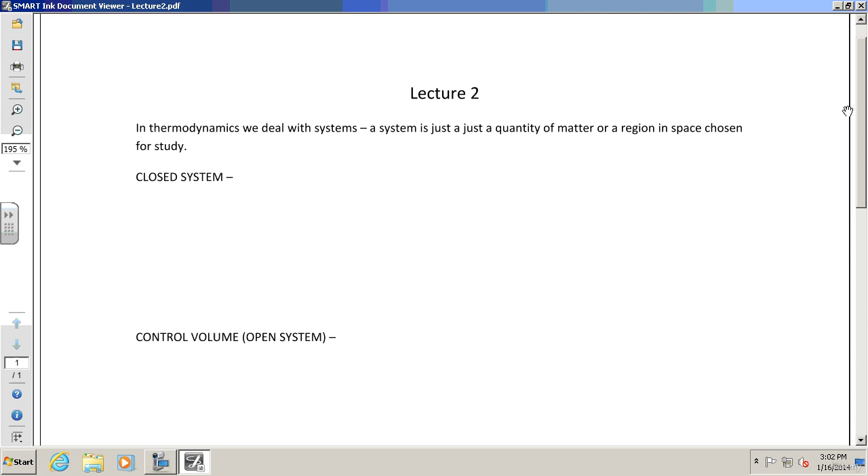All right. So now, with regard to some terminology, I wanted to just go over a few important concepts that we have in thermodynamics real quickly. A couple of important things that we're going to need to know as we go forward, okay? Basically what we're trying to do today is cover most of that first chapter, and you do have a homework due next week that's centered on that first chapter.

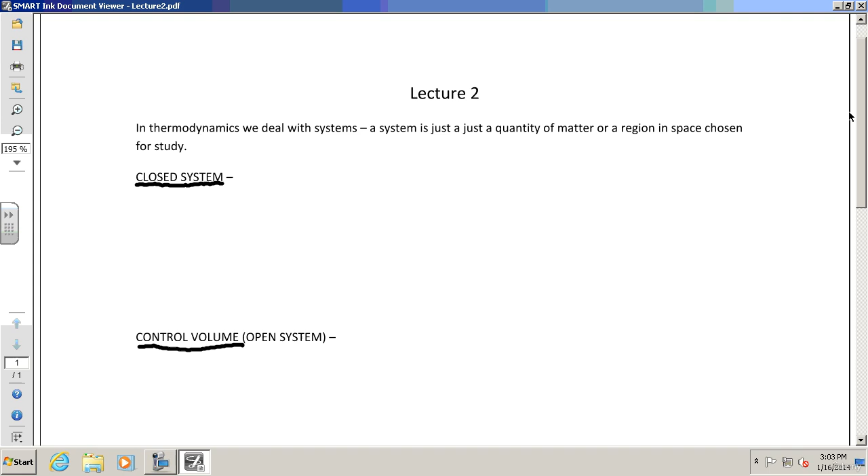One very important distinction in thermodynamics is going to be the difference between a closed system and a control volume. So let me first describe a closed system. It could be something like a box, like this. I like the example of a can of pop or something like that. A closed system is kind of like a pop can that you haven't opened.

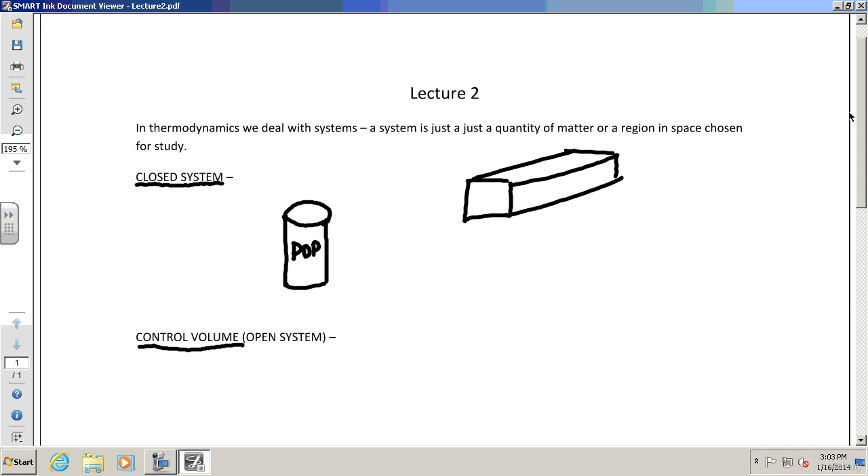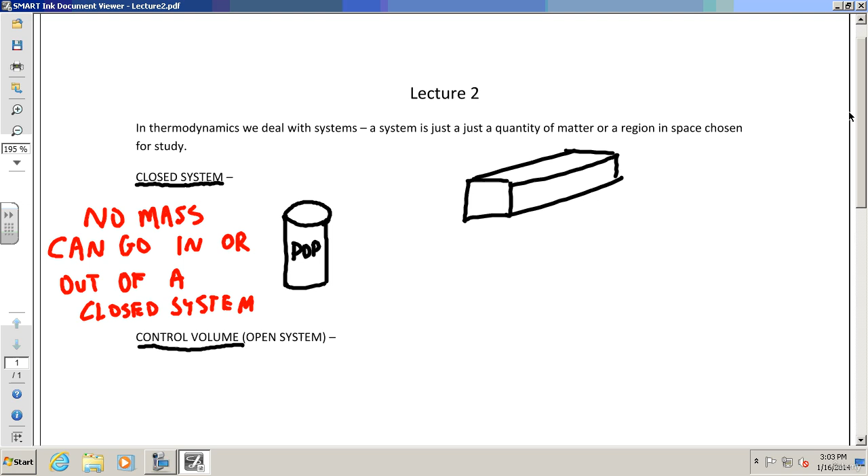There is no mass transfer. No mass can go in or out of a closed system. No mass can go in or out of a closed system. But that doesn't mean there's no energy transfer. You can still have energy going in or out of a closed system. For instance, use the pop can analogy.

Let's say I go downstairs and I get a can of pop. It's likely coming out of the machine cold. If I take this can of pop, I put it here on the table, and I come back 24 hours later, it's probably going to be a lot warmer, right? If I open it up, it's probably going to be room temperature. Now, that's a closed system. There was no mass transfer. If that pop can is still closed when I come back 24 hours later, it's a closed system.

But there was energy transfer, right? Because there was heat from the room transferred in to warm up the pop can. So you can still have an energy transfer in a closed system. There's just no mass going in or out. It's all inside. So no mass can go in or out of a closed system, but you still have energy transfer. That is a closed system.

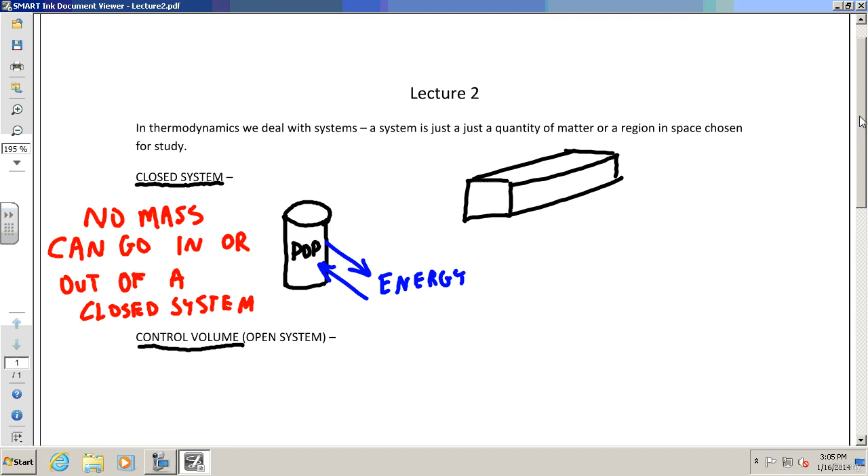We're going to be dealing a lot with closed systems, especially the first 5-6 weeks of the course. Closed systems tend to be a little bit easier to deal with than control volumes, open systems. So we're going to start there and analyze closed systems. But most of the world isn't like that. Most of the world has systems that have mass coming in and out and all sorts of stuff. And so then we have a control volume.

Now a control volume may look something like this. Maybe it's like a tube, and you have mass that can flow in, and you can have mass that can flow out. And of course energy can still flow in or out as well. A true control volume is nothing more than an arbitrary boundary that we put into practice. What I'm drawing for you there in green is an arbitrary boundary for our control volume.

That's what we're going to analyze when we get to control volumes. It will be an arbitrary boundary. I say arbitrary because if I were to show you a system, you couldn't see the control volume. You couldn't see the boundary. It's just in your mind. There's nothing real about it. We just draw a boundary. We say, okay, this is the volume I'm going to study.

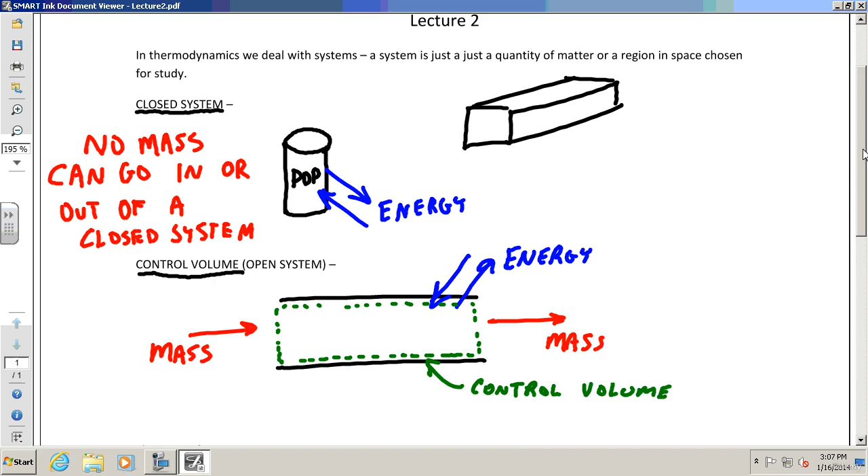But for the first 5 or 6 weeks, we're going to mainly focus on the closed system. Not that you will never see a control volume, but mostly we'll see closed systems. So there won't be mass flow. That's going to make it a lot easier. And then we get to the control volumes. I think you all can see the distinction there. It is an important distinction to recognize, because whether we model it as a closed system or as a control volume, the way we approach either one is going to be important.

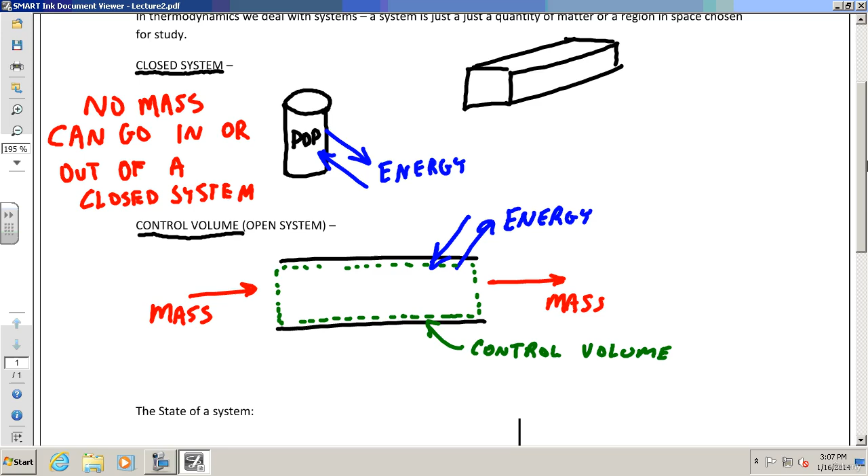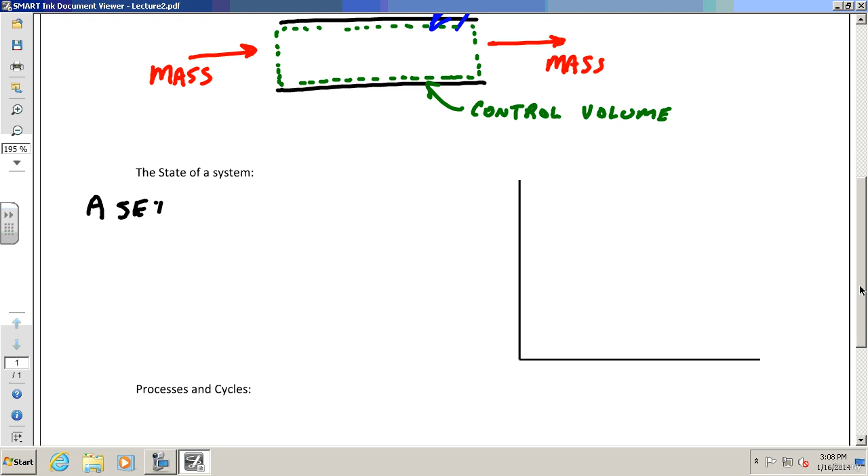All right. A couple more concepts and we'll be done. State of a system. The state of a system is also a very important concept. It basically is a set of properties that completely define a system. A set of properties that completely define a system. Now, you might say, well, what are properties? Properties are physical characteristics of a system.

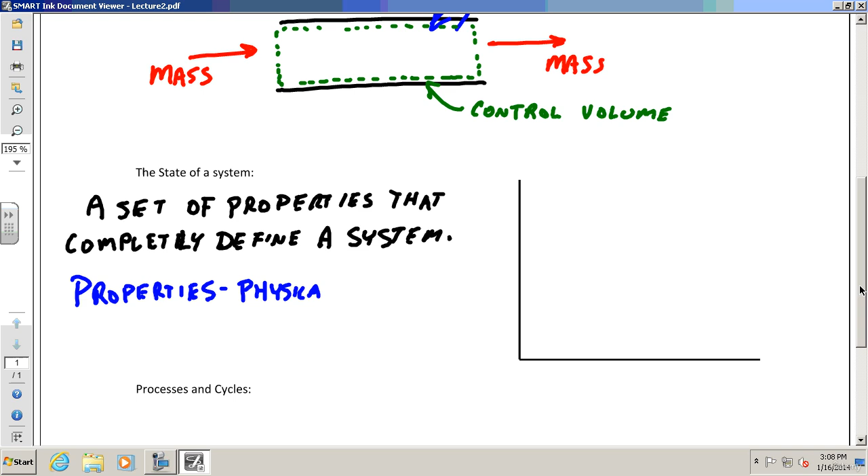Physical characteristics of a system. Now, what kind of physical characteristics might there be? Well, very simple things like temperature, pressure, specific volume. There's lots of them. There's other ones too. We'll get into them later. Okay? The things that define a system.

So, for instance, the pop can. What kind of properties might be of the can of pop when I get it out of the machine? Well, the can of pop probably has a temperature maybe of 35 degrees Fahrenheit. The internal pressure inside the can is a little bit greater than atmospheric pressure. I don't know what it is, but I'll make up a number. It's 20 psi. But it's greater than outside, right? Because you open up the pop can, it releases pressure, right?

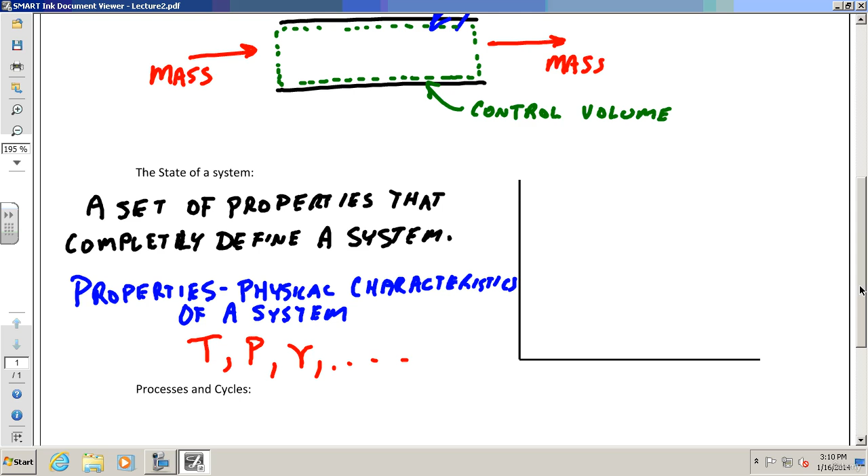So there's a certain temperature, there's a certain pressure, there'd be a certain specific volume of the fluid, okay? Things like that. There's other properties too. We'll get to them as we go. Here's the point I want to get you to, and this is the reason I brought this up. Notice I drew a little chart there. It has an x-axis and a y-axis, okay?

When we know the state of a system, that means we know everything about that system. It turns out that we need two independent properties to find the state of a system. Okay? You need two things.

What that practically means is if I want to figure out all the stuff I want about that system, let's say that can of pop, if I know two things, maybe the temperature, pressure, other things, I usually can figure out all the other properties of the system because I've defined the state. And that's the beautiful thing we're going to do a lot of. We're going to figure out what are the two properties we can figure out of that system, and then we can figure out the state and get all the other properties that I need.

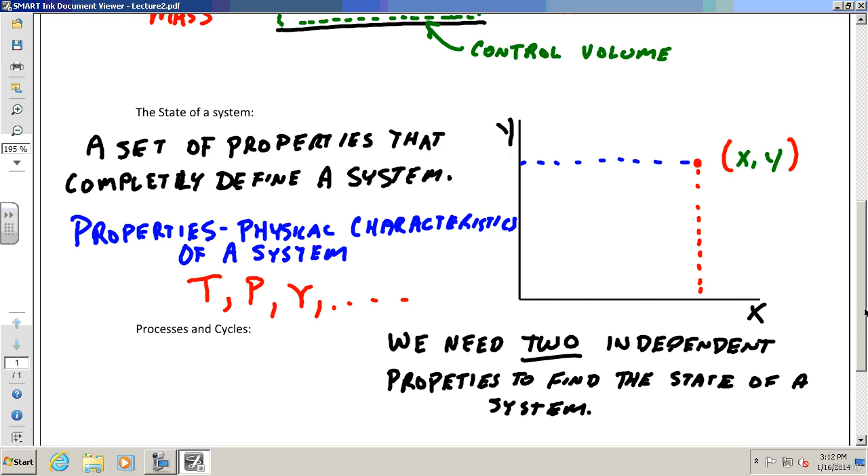I bring that up now just to get you going so that every week we keep talking to this. By about week 5 or 6, you get it. And you go, oh, I need two things, I need two things. You'll get it. Right now, I know you don't get it. You're kind of like, okay, he's telling me I need two things. Whatever. I'll just move on. But later on, that'll be very important. So I'm kind of just planting that right now.

The state is the whole set of properties. Properties are things like temperature, pressure, specific volume. There's lots of other ones. We'll get into them. And you need two of them to get all the other properties. There's like 10 or 15 properties that we're going to use a lot of. But you need two to find the others.

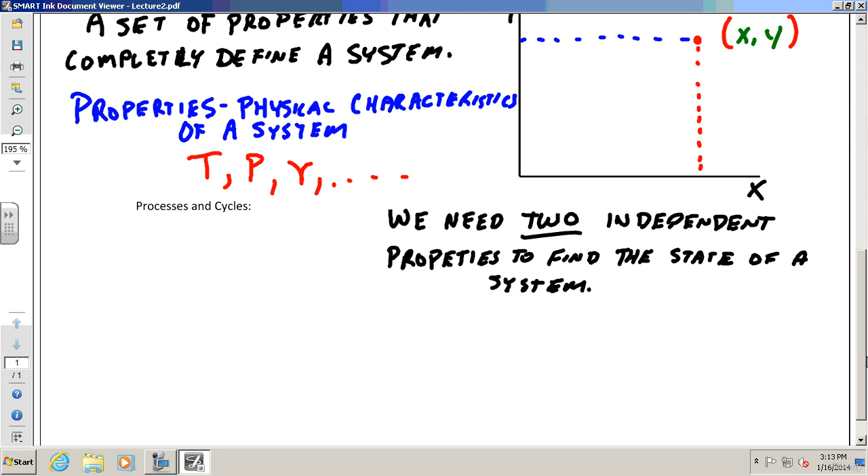Okay? All right. Lastly, real quick, processes and cycles. This is a very simple concept. A process. Process is anything that changes a system from one state to another. So basically anything that changes the system properties is a process.

So for instance, when I put that can of pop and it was cold, and then I waited 24 hours and now the pop is warm, that 24 hours can be thought of as a process. The 24-hour process changed the pop from being cold to warm. Anything that changes something is a process. We're going to deal with a lot of processes.

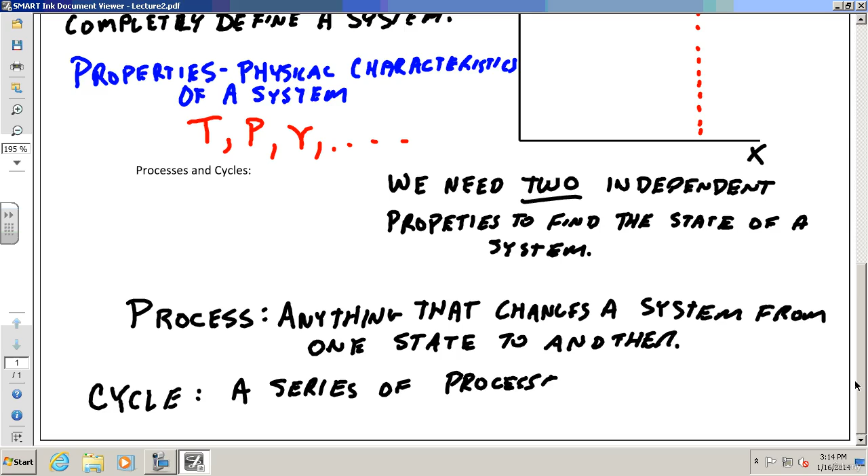And lastly is a cycle. We deal with a lot of cycles too. That is a series of processes that return the system to the original state. It's not a cycle unless you bring it back to where you started. You have to bring it back to where you started. It's a series of processes that return the system to the original state.

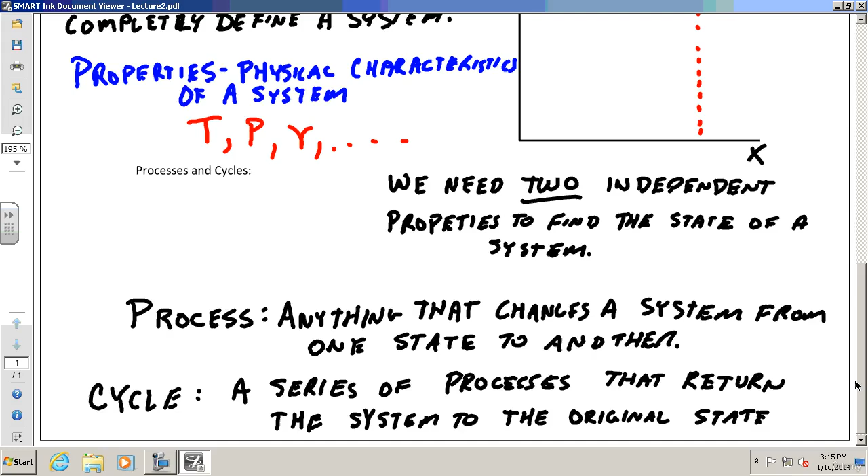You may have heard of an engine cycle, a cyclic engine. We're going to study that cycle in an engine. Refrigeration is a cycle. There's a lot of important cycles. Power plants run on a cycle. It's all cycles. Okay.